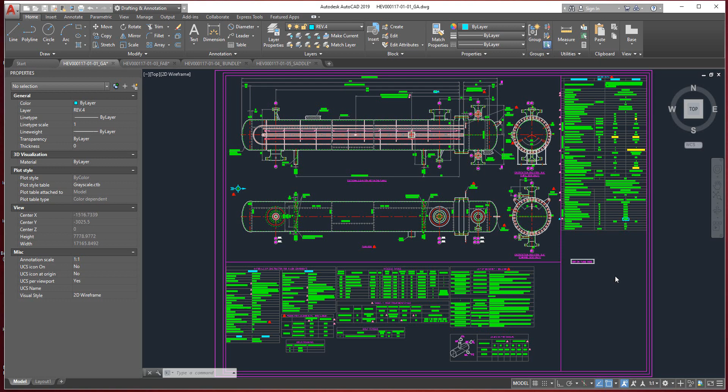This is Ahmed Higazi, and in this tutorial video, inshallah, we will discuss how to create this type of TEMA heat exchanger, BEU TEMA heat exchanger. As you can see here in this AutoCAD drawing, we have a bonnet part and a shell part, and inside we have the tube bundle with U-tube. That's the BEU type heat exchanger. Now let's start modeling the bonnet with the tube sheet and discuss in the first part of this tutorial how to generate that.

Now let's open SEG software, and from the new button, let's create a new project and give it a name. From here, let's select the location of the project and select the module, which is the heat exchanger module. This module will give you the ability to create a tube sheet, expansion joints, and many different items of the heat exchanger. Now let's select the tube sheet, let's select the equipment node from the SEG tree.

As mentioned in the first tutorial for the vertical vessel, you can define the information here. Regarding the position of the equipment, we will leave it as it is, as horizontal, because it's a horizontal heat exchanger, and we will leave the direction to be left to right. But if you take a look at the general arrangement here, the direction of this heat exchanger starts from the right direction to the left direction.

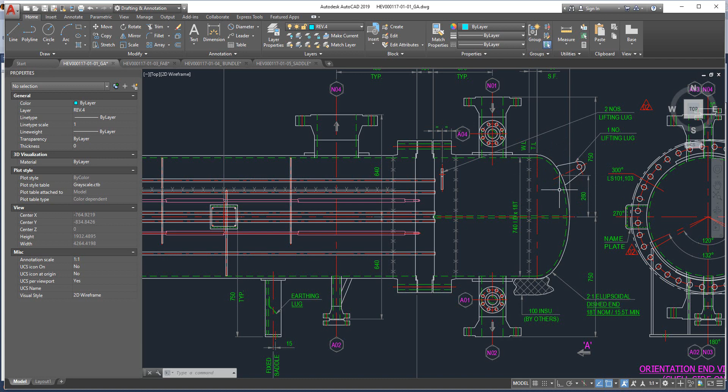In SEG software, if you would like to generate a U type of TEMA heat exchanger, we recommend making it from left to right. That means you will start generating your equipment from left to right direction instead of right to left like this drawing. And in your drawing, you will look from the elevation view from the right view. We could discuss that. Now let's keep everything as it is, and from here let's start creating the first element, which is an ellipsoidal head.

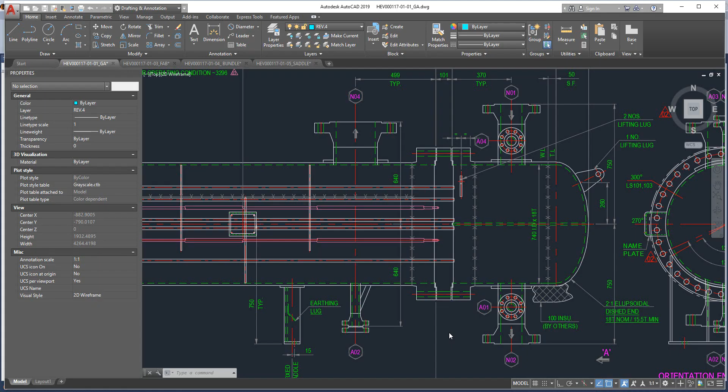So it will be the right head, and for the right head we will select the suitable type for this type of head. Now let's open this one, and as you can see, it's a half of an ellipse, not a head with crown and knuckle radius. As mentioned here in this drawing, it's a half of ellipse, so we will select the same type here, which is ellipsoidal head - a half of ellipse, not a head with crown and knuckle radius.

So let's select this type and define the inside diameter. As mentioned here in this drawing, it's 740. So the inside diameter is 740, the thickness is 18, straight flange 50, and the minimum thickness after forming is 15.5. And here's the head ratio. And here the material, we will keep it as it is, and we will click save.

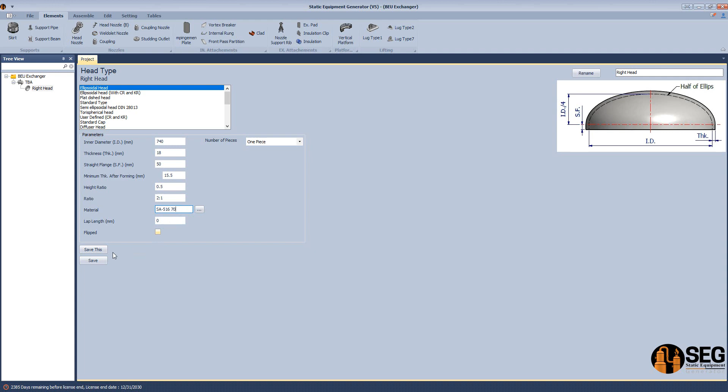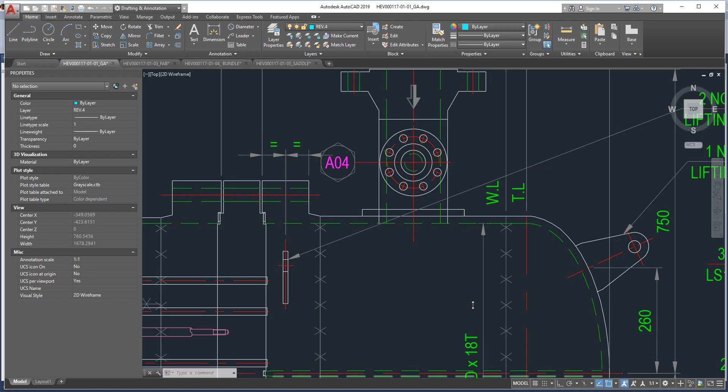Now let's add the second element, which is can one. From here let's select shell element, and if we measure the length of this can from here to the straight flange, it's 455. So the inside diameter is 740, the thickness is 18, and the orientation for welding line 1 and 3 is 300. So it's 300 and 455, and here's the gap, and let's click save.

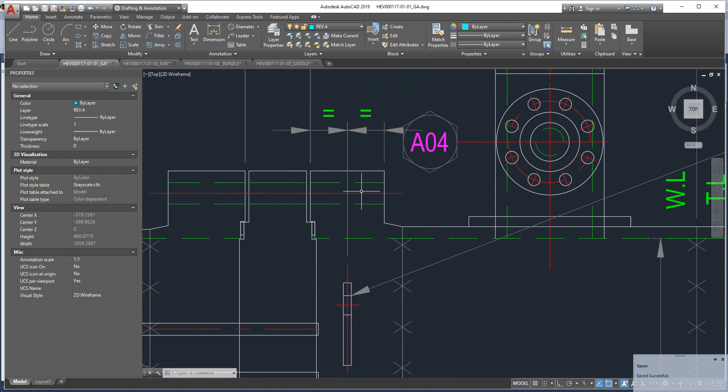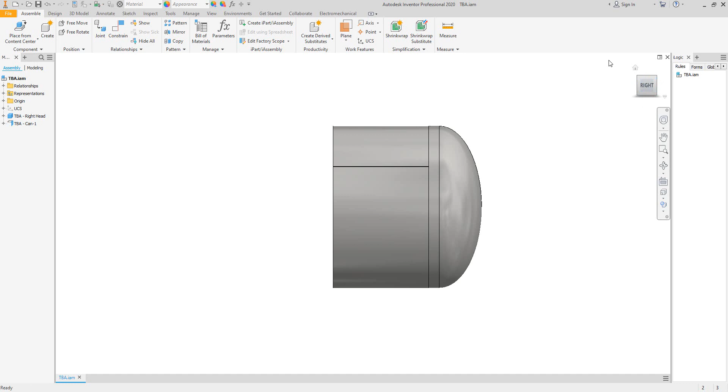Now we have another element - let's start creating the assembly. From here we have this flange, which is a heat exchanger flange with a grooved raised face. It's not with a projected raised face, it's a grooved raised face. Now let's open SEG again, and as you can see here, we have the first bonnet. In your drawing you will use the right view to add the elevation view for this heat exchanger. Now let's add the designed flange.

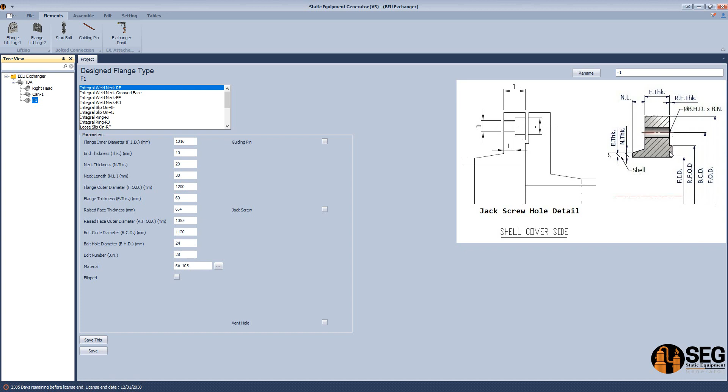So from here let's select designed flange and name it F1. From here, select this flange. If you take a look at the image on the right hand side, the first type was integral welded neck with a raised face - as you can see, this raised face is a projected raised face, but actually we need a grooved raised face, which is the second type of the designed flange. Kindly take a look at the image on the right hand side, and from here let's define the dimensions of this flange.

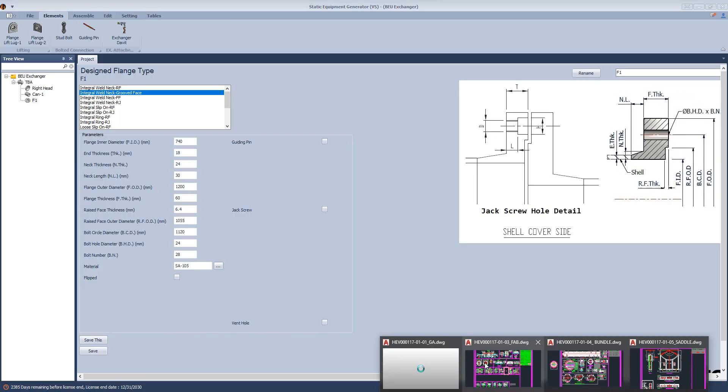So the inside diameter is 740, and the end thickness of this one, which is the same thickness as the shell, is 18 millimeters, and the neck thickness is 24. So we can take a look at this view here - the end thickness is 18 millimeters, and the neck thickness is 24.

And here's the neck length, as per this drawing, is 28. So it's 28, and the flange outside diameter is 950, and the flange thickness is 114.

Okay, and the raised face thickness is 7 millimeters, and the raised face outside diameter is 793, and the bolt circle diameter is 880, and the bolt hole diameter is 33 millimeters, and the number of bolts there is 36.

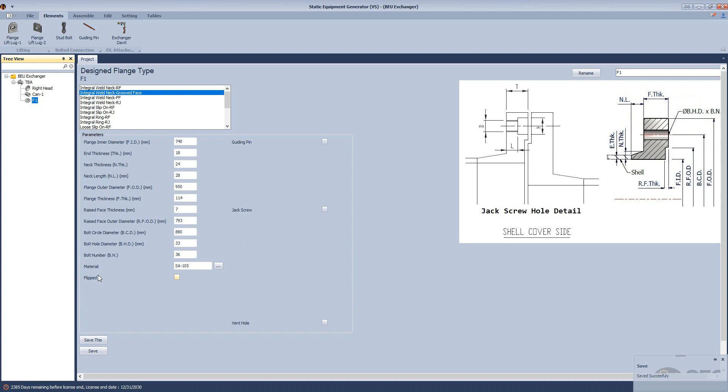Now let's save this flange, and let's check the flip option after creating this flange to check if the direction of the flange is correct or not. Okay, now this flange will be generated, the direction of the flange in a correct way. So as you can see here, we have this flange direction is okay.

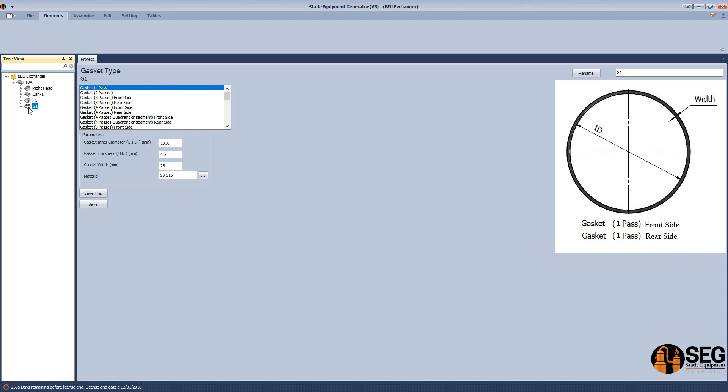Now let's add a pass partition, a gasket with a pass partition. So from here, let's select element, and from here, let's select gasket with pass partition and give it a name as G1. And from here, let's select the number of pass partitions. We have 2 passes, so we have a part here on the middle.

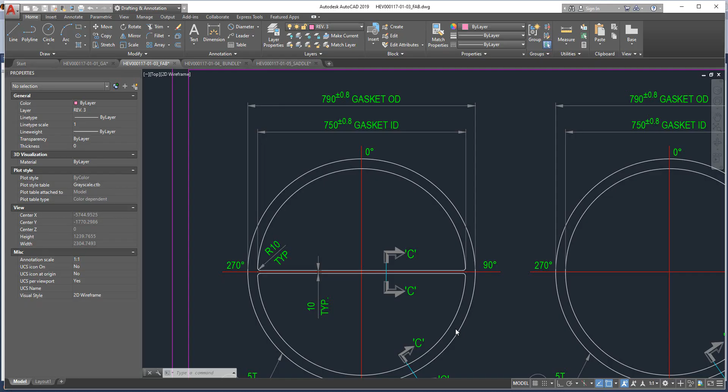So let's define the gasket inside diameter as 750. Let's check the drawing here - we have that value, which is the inside diameter of the gasket, and here the gasket thickness. As per this drawing, it's 5 millimeters. So we will define it as 5 millimeters, and the gasket width is 20 millimeters, which is the inside diameter, and here we have the outside diameter. The difference is 40 millimeters, so divided by 2, it will be 20 millimeters on each side.

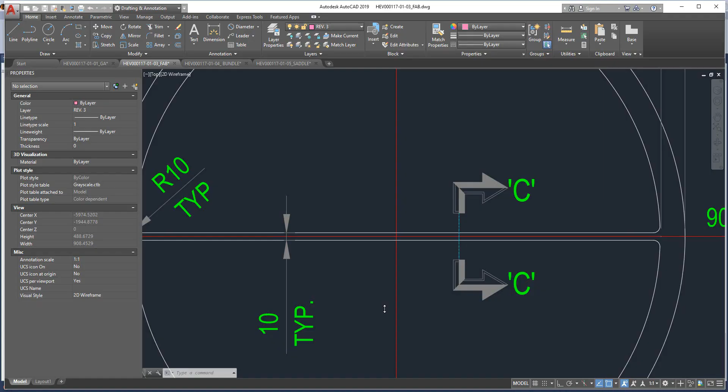And here the gasket TB thickness, which is the thickness at the middle here, is 10 millimeters, and here the fillet as per this drawing is 10 millimeters, so we will make this value 10, and the orientation is 0. And now let's click on save.

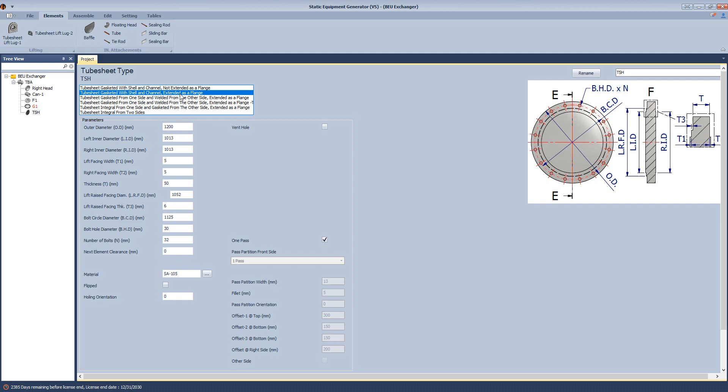Now let's add another part, which is the tube sheet. So from here, let's add a tube sheet. Select this item, which is tube sheet, and click add. And from here, let's select the type of the tube sheet - it's extended as a flange. So let's select the second type, which is tube sheet gasketed with shell and channel, extended as a flange.

And from here, let's define the outside diameter of this tube sheet. It's 950. And if we come back to this drawing until it's opening, let's define the dimensions - the left inside diameter is 737.

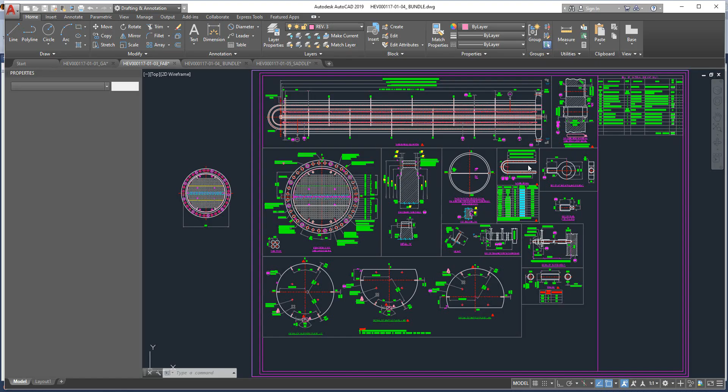And here for the left face raised face diameter, it's 790, sorry, and for the raised face thickness is 8 millimeters and 8 millimeters, and here the bolt circle diameter is 880 millimeters, and for the bolt hole diameter is 33, and the number of bolts is 36.

And now the number of passes, let's activate that one and make it with 2 passes, and here define the pass partition, and the fillet will be make it 15, and keep the other dimensions as they are, and from here click on save. Now as you can see here, we defined the dimensions, the main dimensions of this tube sheet.

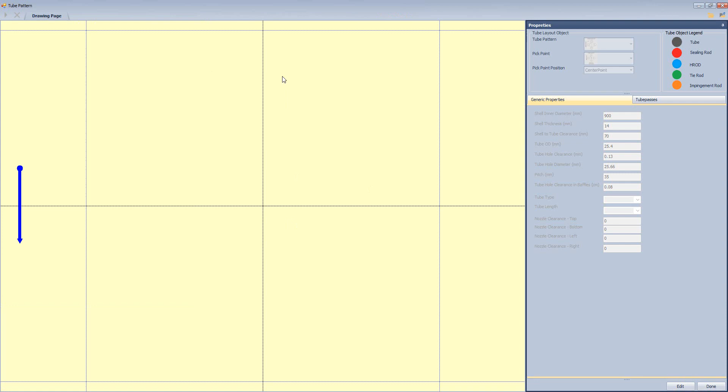And from the tube bundle we will generate the arrangement of tubes. So from here, let's make an editing on this form and define the shell inside diameter, and the shell thickness is 14, and the clearance, let's make it 10 millimeters, and here the tube outside diameter.

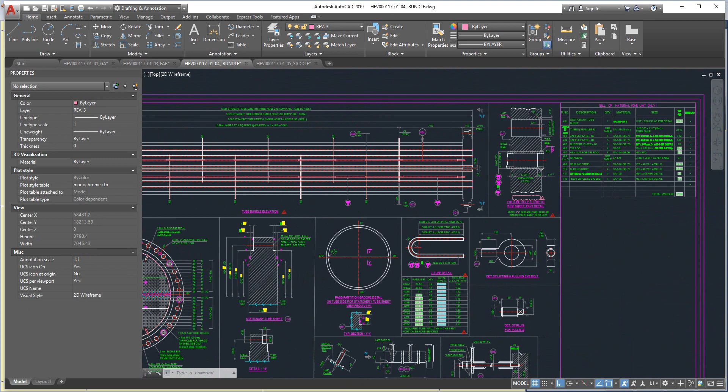So if we take a look at this drawing here, the tube outside diameter is 19.05 with thickness 2.11. So from here, let's define the tube diameter. Okay, and here the tube clearance, and here the pitch will be 25.4. So if we come back here and check, this detail is 25.4.

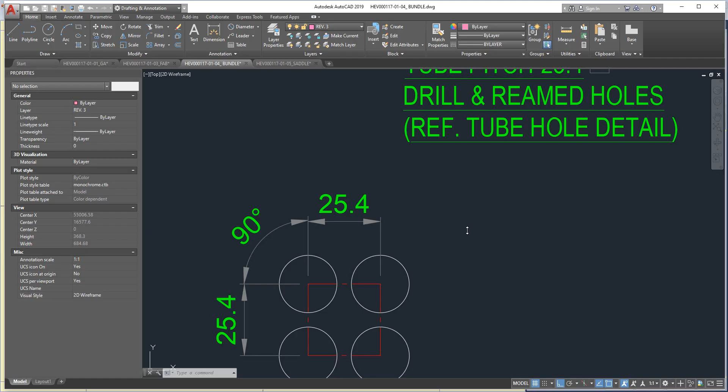So let's define the spacing, and here the clearance. And for the top clearance, if we take a look from here, if we measure the value from here to there, for example, here we have, let's say, 110 millimeters around that value. So let's make it to be like that at top and at the bottom.

Okay, and for the pass partition, we have two passes, and here the vertical pass lane will equal...

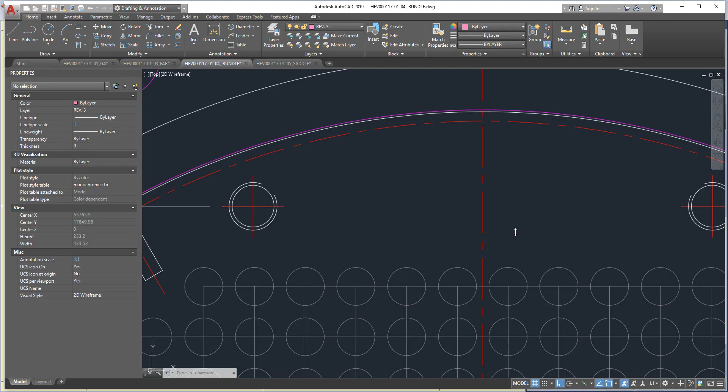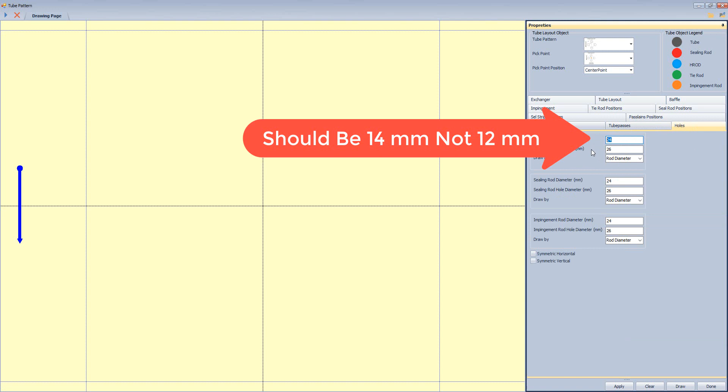So if we come back to the drawing here and check the vertical pass lane, that value will be 9.58. So let's define 9.58, and the same for the vertical and horizontal pass lane here, and make a symmetrical distribution for holes. And here for the tie rod hole, it will be 14. The tie rod diameter will be 14, and the tie rod hole diameter will be like that.

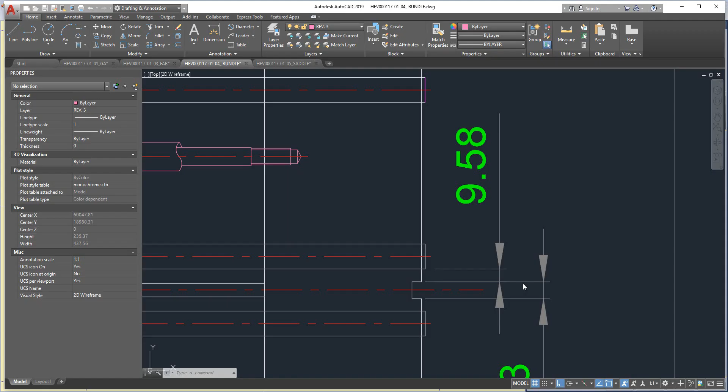And we don't have a sealing rod, so we can keep everything as it is and make all positions symmetric. So here for the tie rod position, we can define the depth. If we take a look here, the tie rod has a 20 millimeter depth. So we can define this as 20 millimeters depth, and the end will be like that. And the size will be 14. And for the sealing rod, we can keep it as it is because we don't have a sealing rod.

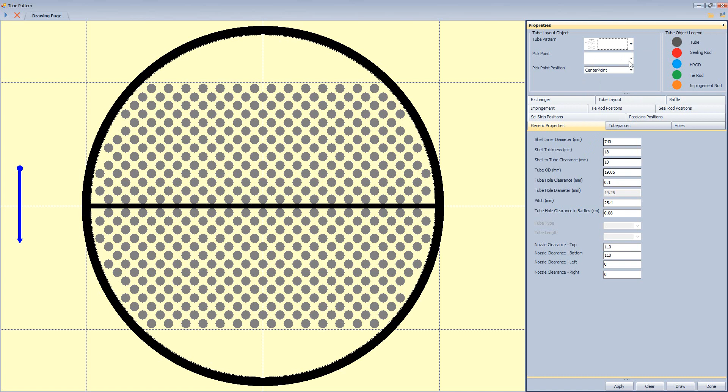And here for the tube layout, as you can see, you can select between a straight hole or a hole with a chamfered end. And now if we come back again to this form and click generate tubes, as you can see, we get an arrangement for tubes like that. But actually, if we take a look at the tube arrangement, it's 90 degrees. So let's select the square with a 90-degree arrangement, and from here select the base point to be at the center and redraw the arrangement again.

Now the vertical pass lane value, we need to redefine it and measure it in a correct way. So let's measure the value from the center here to the center there. It's 25.6. So we need to define this value as 25.6 and 25.6 and draw again. Here we have the modified orientation for this one, and let's take a look at the arrangement of the tubes.

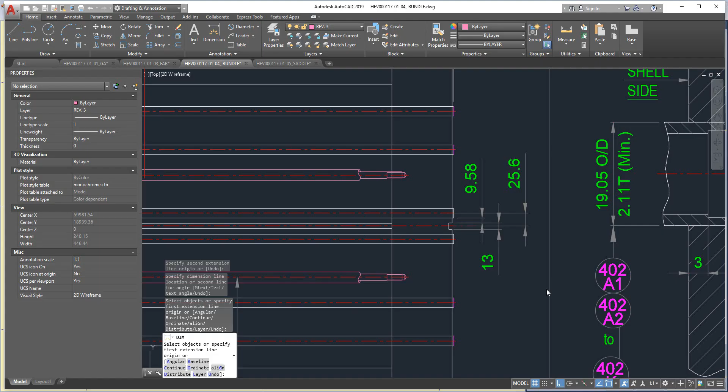Here we have 1, 2, 3, 4, 5, 6, 7, 8, 9 rows. So here let's check that we have 1, 2, 3, 4, 5, 6, 7, 8, 9, 10, 11. So we need to check that arrangement again. Maybe something is not correct in the arrangement. So we need to decrease this value. Let's make it 55 and 55. Something may not be correct on the scale of this drawing, so let's check the scale.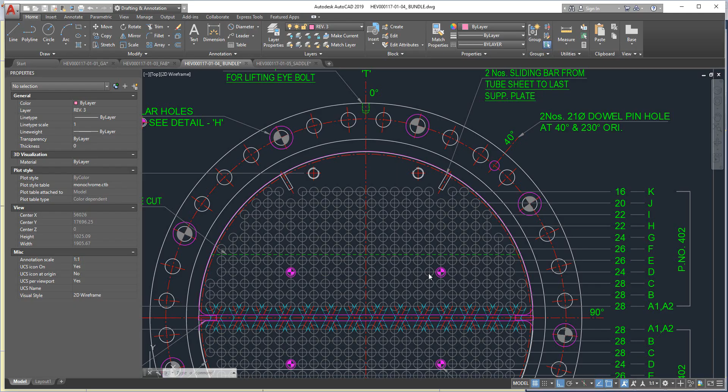65, and increase the clearance and recreate the drawing again. So let's increase the clearance again and recalculate. Okay, now we have this arrangement. Let's count the number of rows: 1, 2, 3, 4, 5, 6, 7, 8, 9, 10, 11. So we have 11 rows that way. Okay, and let's come back to this arrangement again.

As you can see here, if we take a look at that view, we have 4 equal rows, but here we have 3 rows only. So we need to remove one hole from here, or we can use the OTL instead of the vessel inside diameter and clearance, so we can directly use that value, which is 725.54, for example, and make the clearance equal 0 and draw that again. Okay, the tube sheet clearance. So I think we need to redefine that

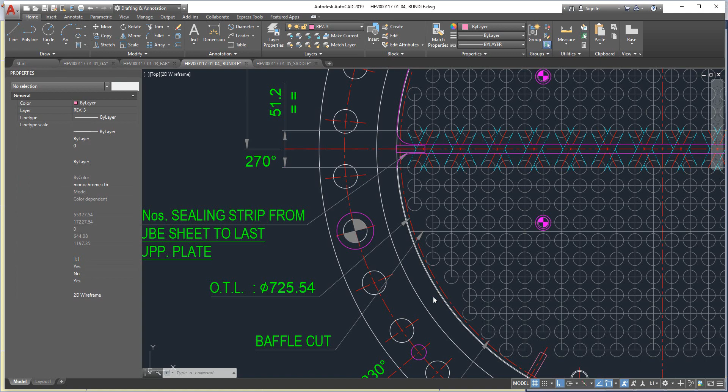and generate that. And now let's count the number of holes per row: 1, 2, 3, 4, 5, 6, 7, 8, 9, 10, 11, 12, 13. And here, if we take a look, it's 26. So I think we need to increase the number to decrease that value. So let's make it 15 and draw. One, two, three, 5, 6, 7.

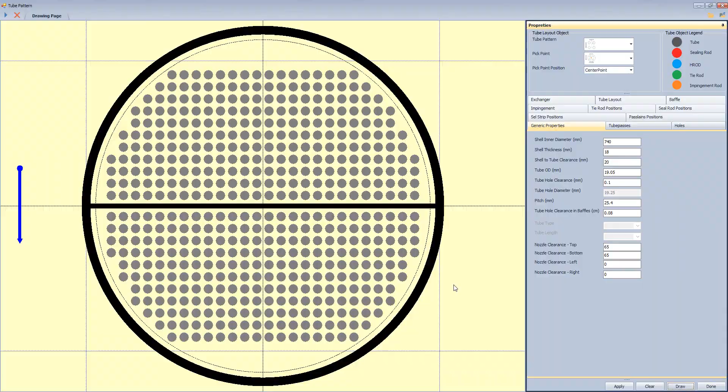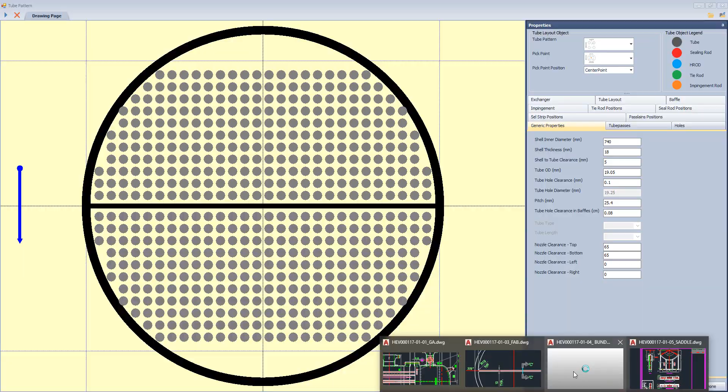Okay, so as you can see, the first row has 28 holes. Here for the first 3 rows, we have the same number, which is 28, and for the next one, we have 26 holes. And if we take a look here, after 1, 2, 3, 4, 5, 6, the 7th hole is converted to a tie rod. So on that row, 1, 2, 3, 4, 5, 6, 7, this one will be a tie rod.

As you can see, we converted it to a tie rod, and so those rows will be with 3 holes, and for the top one, it will be minus one hole.

So that one is correct. And now let's remove this hole, and from here remove this one, remove this one, and remove that one. So as you can see here, we removed the top hole from here, which is the hole that exists in that area. Okay, and for the second two rows, they are the same, so that one and that one are okay.

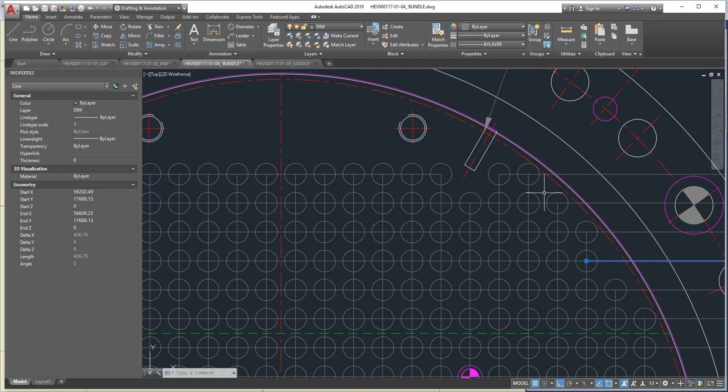And the other one does not include a tie rod or a sealing rod, but here we have removed a hole on the 7th vertical row. So same here, we will remove this one. So the same we will do on the other side. And here on the same row, we will remove this one and remove this one.

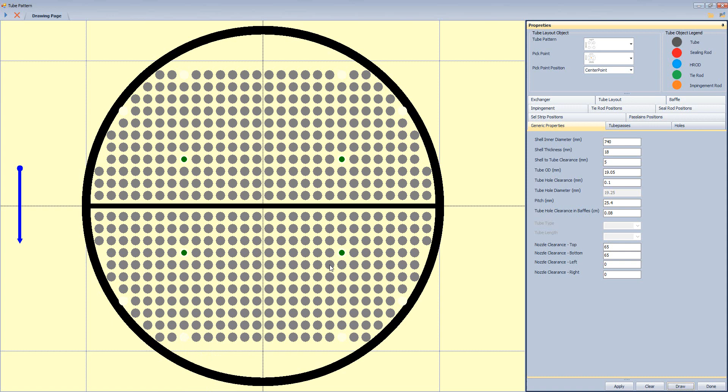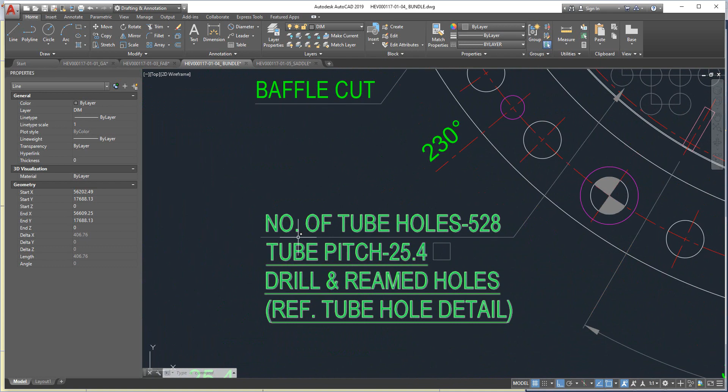Okay, now let's go to the tube passes and calculate the number of holes. So in the top side, we have 264, and on the bottom side, it's 264. So 264 by 2, the total number of holes is 528. So if we come back here and check the number of holes, it's 528 holes. It's the same arrangement of the tubes.

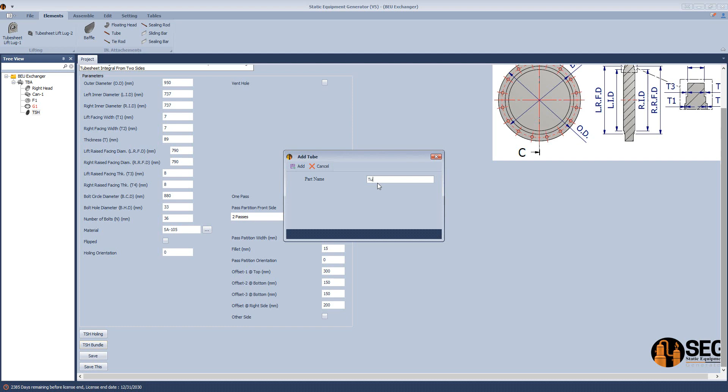Now let's export the information which we generated to SEG. So from here, let's export the information and close this form. Now let's add some attachments like tubes, tie rods, and baffles for this tube bundle. Now let's add the tube. Okay, and from here, let's select the appended tube and define the length.

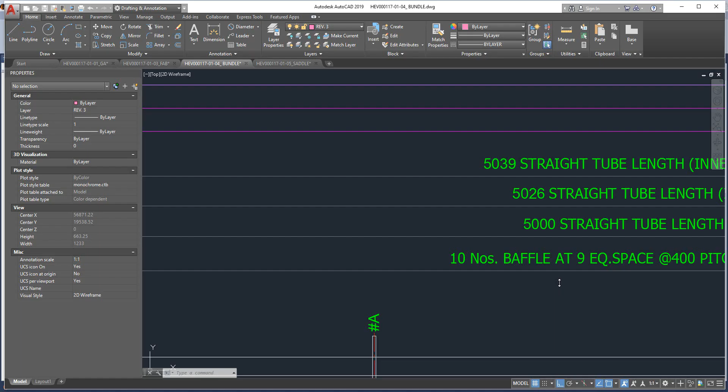So if we come back to the model here, as I figured, we have 3 different lengths for the tube, but in SEG software, we can define only one length for the tube. So we will select the greater one. So from here, let's define this value. And here the thickness of the tube, and here the offset from the end, which is that value. We can measure it from here to there. It's 3 millimeters, and it's clear here in this detail. And click on save. Now let's add the tie rod.

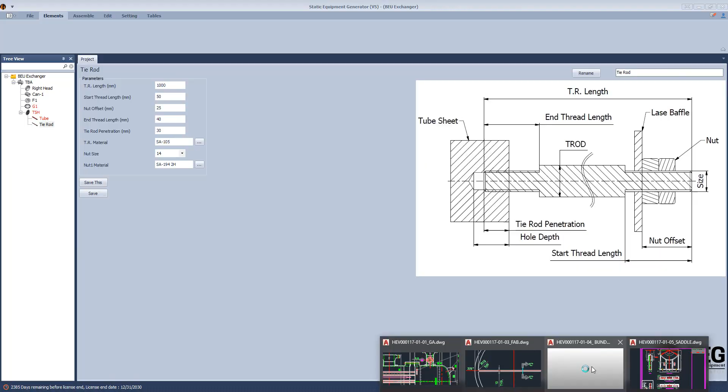And for the tie rod, let's define the tie rod length. So from here, let's check this view. Here the tie rod length is 4893. And for the start thread length, as per this drawing it's 60. Okay, and for the nut offset, it's 40 millimeters, and for the thread at the end it's 30. The tie rod penetration is 20 millimeters, and the nut size is 12. That's the nut size. And let's click on save.

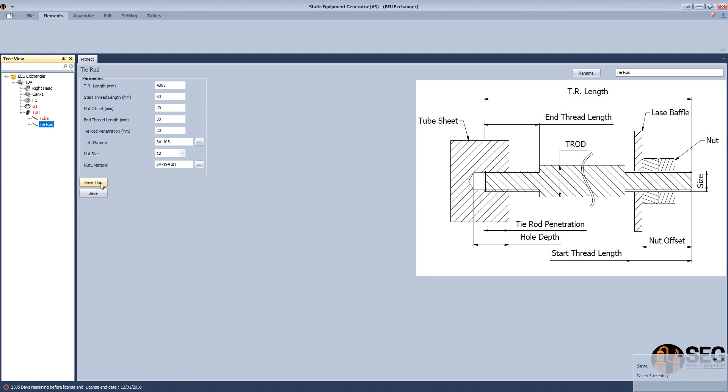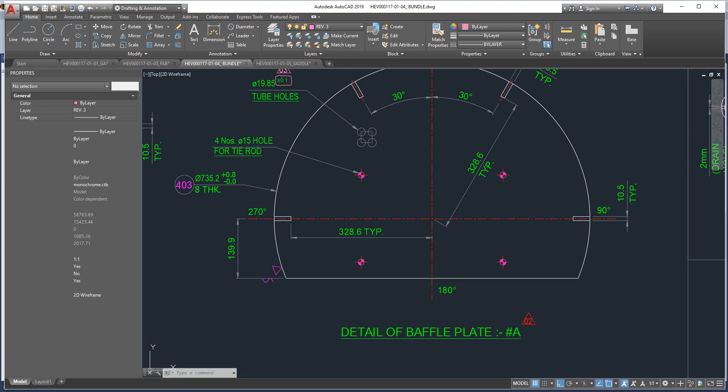Okay, and now let's add the baffles. So from here, let's add baffle 1 or baffle A. For baffle A, we will select the segmental baffle, and from here the inside diameter of the can and the baffle height. So if we take a look at the baffle here, that's the cut, and per the definition here, we need the height. So from this drawing, we can calculate the required height by that equation. That's the inside diameter divided by 2 to get the value from the center to the inside surface of the vessel. And now let's add that value. So that will be the H value.

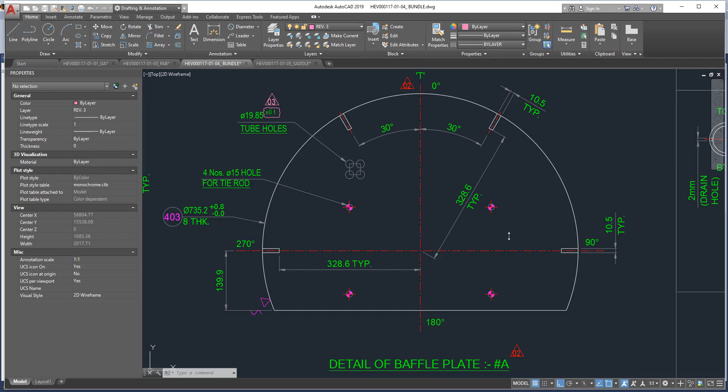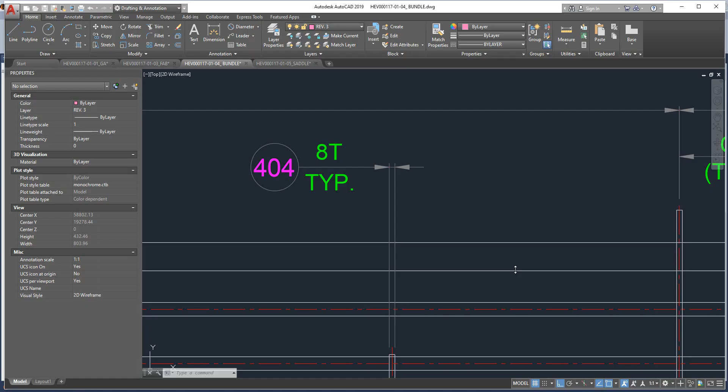So we can add it right here, and here the spacing between baffles. If we check, the spacing equals 400 millimeters. So for the typical, it's 400. The thickness is 8 millimeters, and the clearance will be 2.4. So how to calculate the clearance? Here we have the outside diameter, and here we have the inside diameter of the vessel, minus 735.2. That's the total clearance divided by 2. So that will be the clearance on a single side.

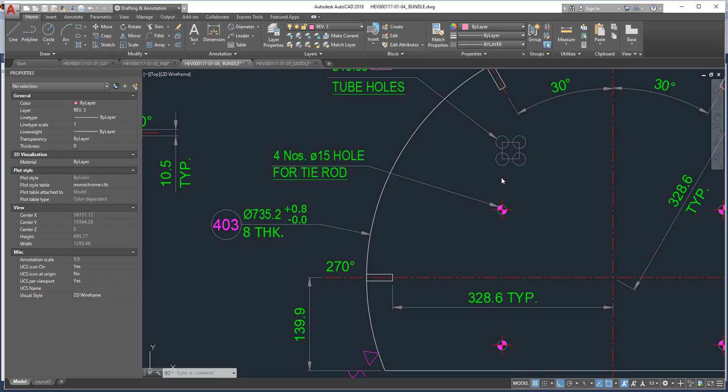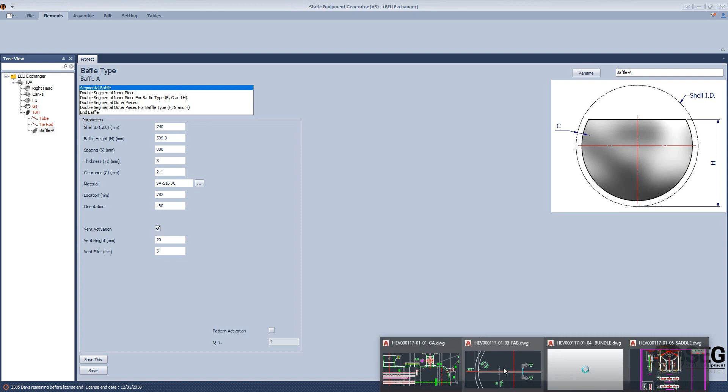So we will define this value, and the location for the first baffle will be measured from that face, from here to the center line. So it will be 782. Above this value, we will increase the facing thickness here. So the location will be 782, and the orientation will be 180 degrees because the cut is at the bottom. And here we don't have the vent, and the number of baffles required is 5.

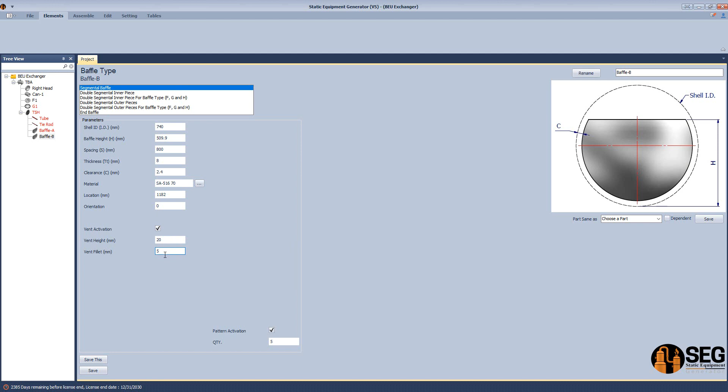Now let's add another baffle, which is baffle B, and we will make it look like baffle A. Okay, so from here let's define the height, spacing, and the thickness. For the location of the first baffle of type B, we will add 400 millimeters. So the location will be 1182, and the orientation will be 0, and for the vent, that's the vent hole, and here the quantity is 5. Now let's add the last baffle, which is baffle C.

Okay, and click on add. And for the baffle C, it's an end baffle, so it's a complete baffle. And from here, let's define the inside diameter, and the cut will be equal 0 and 0, and the thickness will be 16 millimeters, and the clearance will be 2.4, and the location as per this drawing, we can measure it from here to there.

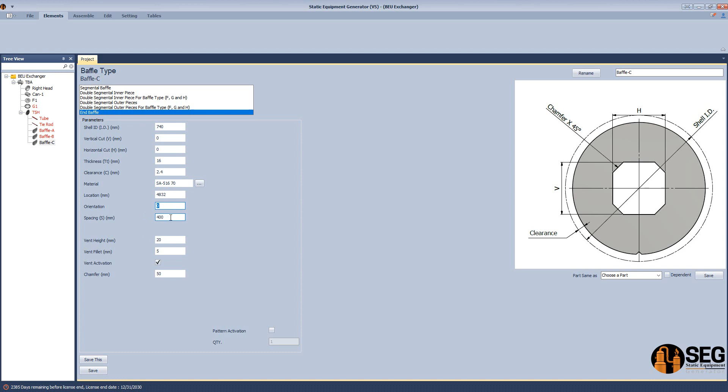Okay, so it's 4,832, so the location will be 4,832, and here no orientation and no spacing, and the vertical vent. I think we need to check if we have a vertical vent or not. No, we have a bottom vent only, so we can make the orientation 180, so the vent will be like that, and no chamfer and no required quantities.

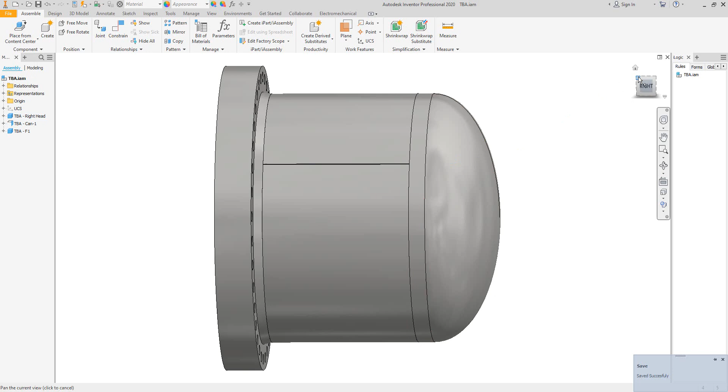Now let's create the assembly. So the first part will be generated, which is the gasketed pass partition, which is that one. After that, the tube sheet, and finally the attachments for this tube sheet, like bended tube, the first bended tube, the tie rod, and the 3 baffles.

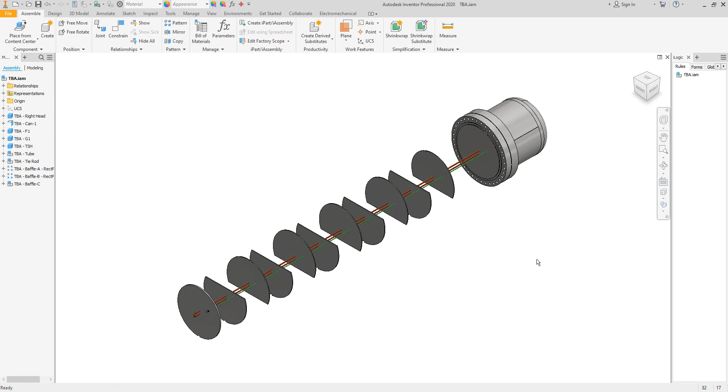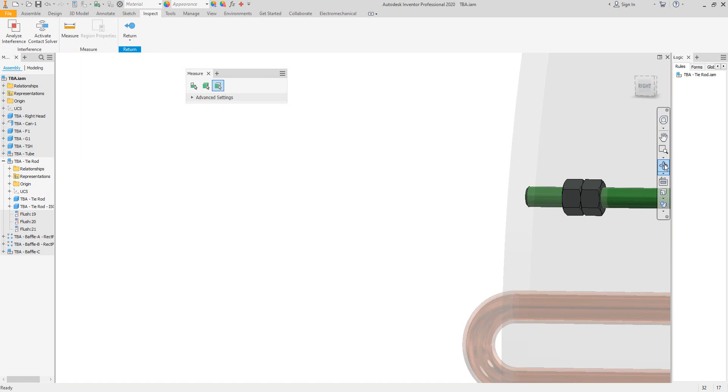Okay, here as you can see, we generate the baffles and the tie rods, and I think we may need to increase the nut spacing a little bit, so we can inspect and measure the distance between this nut from that surface to that surface and make it 33. Okay, so return back and make a modification here on the tie rod and make the nut offset 33, and click on save. Now let's update the assembly to update the nut offset.

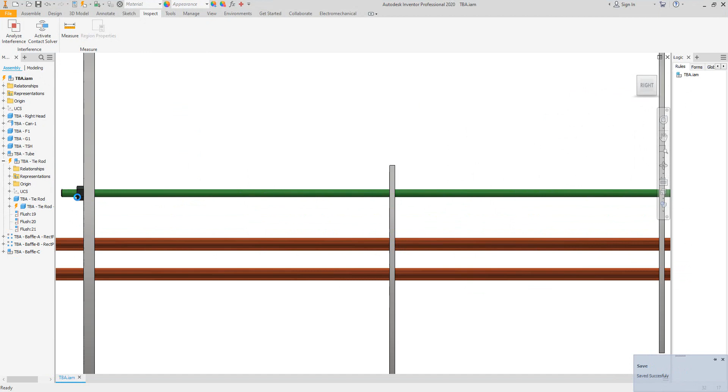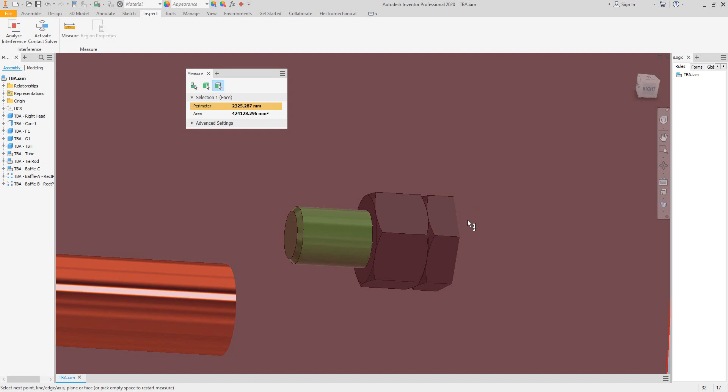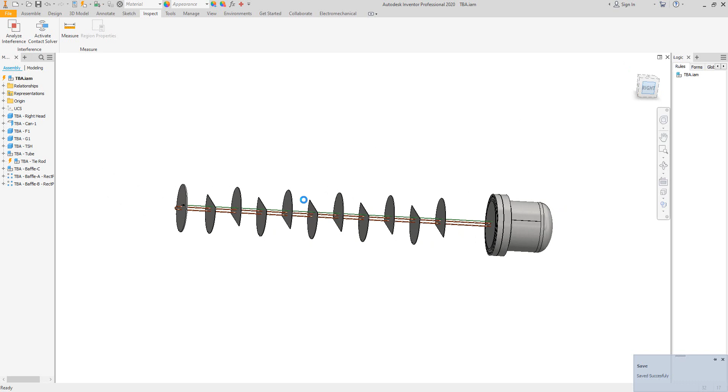We need to decrease this value a little bit more, so we can measure the distance from here to the face down there, so we can select the suitable face, which is that face. We need to decrease 11 millimeters from here, so it will be 22, and on the assembly update the nut. To be like that.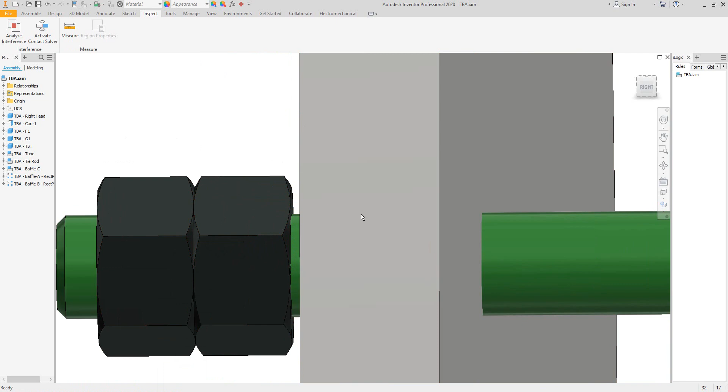So we need to decrease 6 millimeters. So the nut offset will be 28. Okay, now it's adjusted. Now to make the pattern of the tubes.

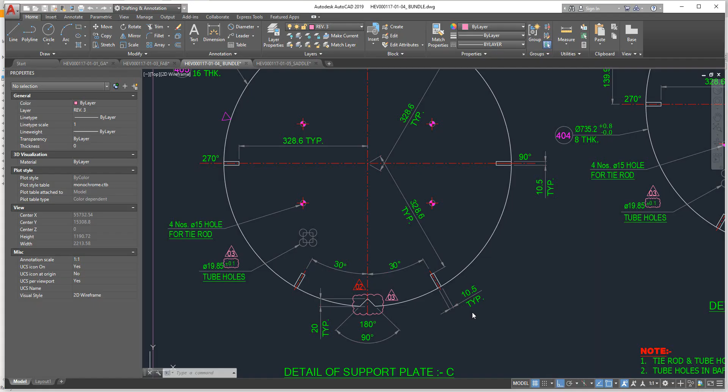Before creating the pattern, I would like to notify you of something. Here, as you can see, the tubes for the first row are crossed. Here in SEG, this option is not available. So we will generate it as a tube directly from here to there. Okay, from here to there, not from here to there. Okay, so now let's come back here, and for the tube sheet,

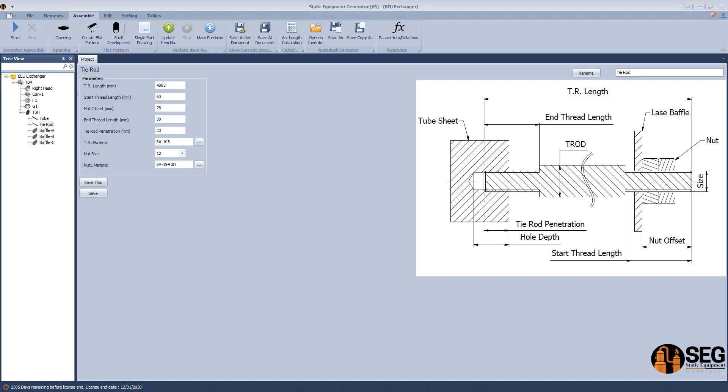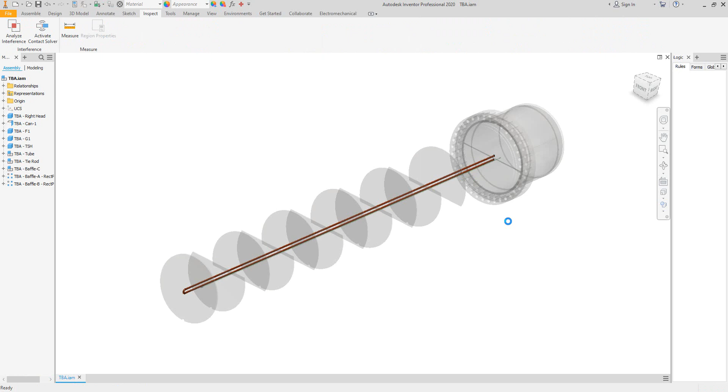we will open the tube sheet tooling, and from here, let's click on Start Holing to start generating the tube pattern arrangement and tube sheet holing. This process may take several minutes to be generated, so I will keep the machine running. After that, on the second tutorial, inshallah, we will complete the main equipment items, and we will generate some attachments.

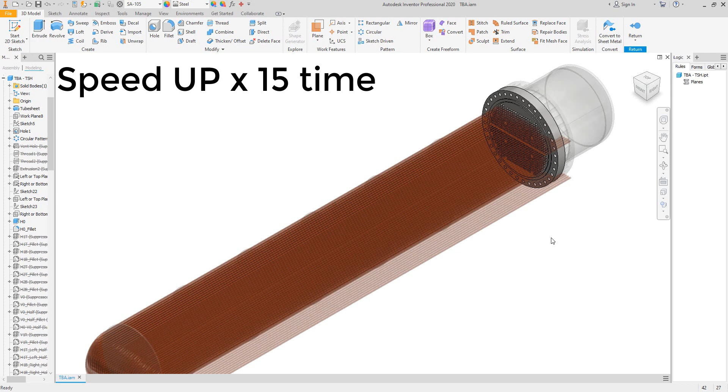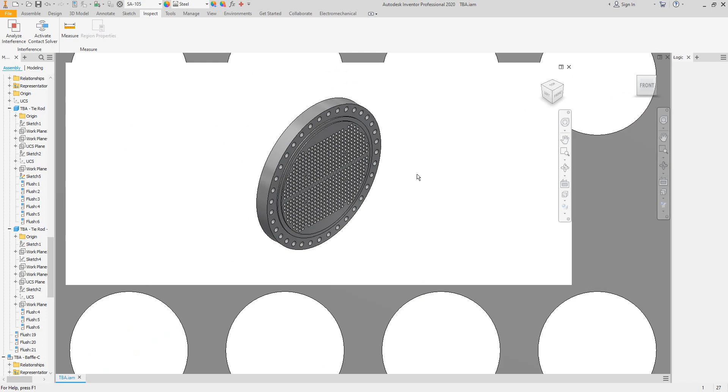Okay, here finally we generate the whole pattern for all elements like tubes, baffles. So if we open the tube bundle, tube sheet, for example, you will find here the tube sheet, including the tie rod holes, as you can see here. Okay, like that. And for the baffles, let's close this and collapse all children. And for the baffles, here let's open the baffle A.

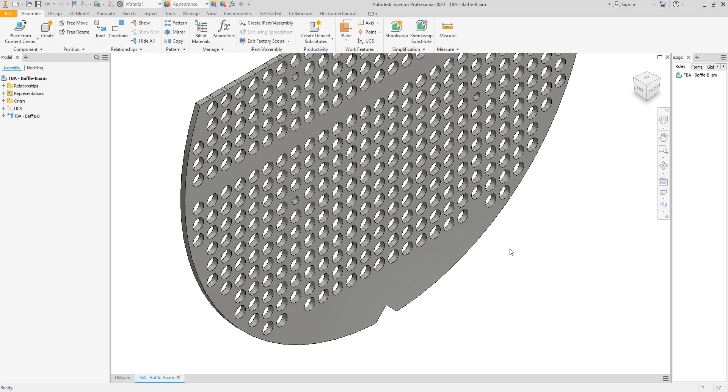And here that's the first baffle. And the second baffle, which is baffle B. Okay, here the baffle B with the vent. And finally the baffle C, which is the end baffle. It's like that. And as you can see here, one of the tube rows is shifted a little bit. That's because the API on Autodesk Inventor 2020 and 2021 needs an update.

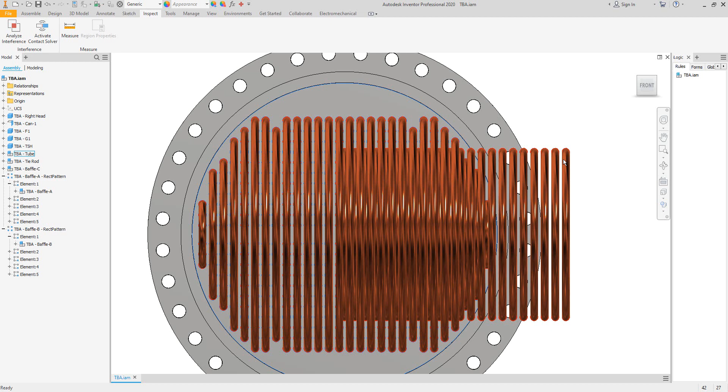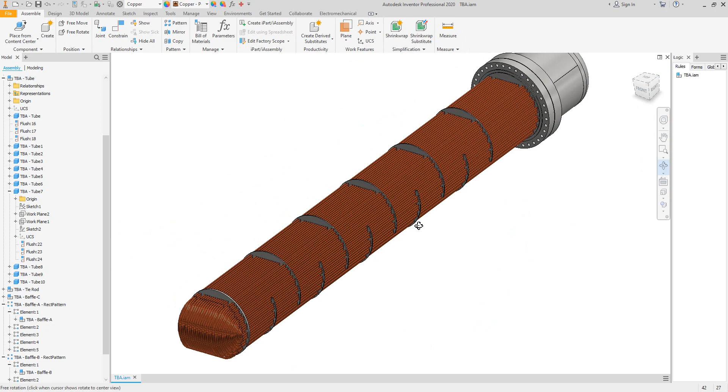So how to solve this? It's very easy. Now let's go inside this pattern. Okay, and from here you will find a driven sketch pattern. All we need to do is open this pattern and click OK. Nothing else. So as you can see, it's adjusted automatically. If you face this issue, just open the part and double click on the pattern and it will be adjusted in one time. Here, as you can see, we have the tube bundle assembly. Okay, it will be like that.

And on the next part of the tutorial, inshallah, we will discuss how to generate the remaining items for the BEU heat exchanger, and on the next parts we will discuss how to add the attachments like nozzles and a nozzle attached to another nozzle.